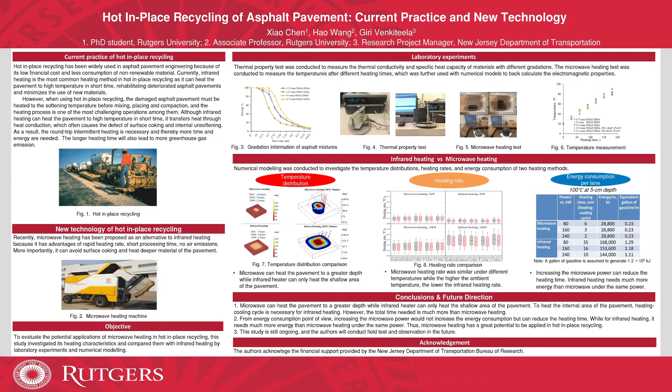Our next poster is titled An Innovative Green Pervious Concrete Made with Modified Geopolymer Materials, presented by Rutgers University, Huang. Hello everyone, it's happy to be here to share my study with you. Today my presentation title is An Innovative Green Pervious Concrete Made with Modified Geopolymer Materials.

As we know, pervious concrete is a typical type of concrete with interconnected pores, usually made with cementitious materials such as cement and coarse aggregate. Owing to its unique porous structure, it is beneficial in several pavement applications, such as stormwater mitigation, urban heat island reduction, vehicle noise reduction, and pollutant water purification.

However, the relatively lower mechanical strength of pervious concrete largely limits its applications, and the use of cement is also proved to be a major source of carbon dioxide emission. Thus, it is desired to fabricate pervious concrete for superior performance while reducing the carbon footprint.

Recently, alkali-activated geopolymer has been developed due to its better durability and environmental benefits. It does not release carbon dioxide during production, and many waste materials or byproducts can be used as raw materials. It is desired to apply the geopolymer in pervious concrete without interfering with its original porous structure and to enhance its mechanical performance. The geopolymer-based pervious concrete has high potential to be applied as a green pavement material.

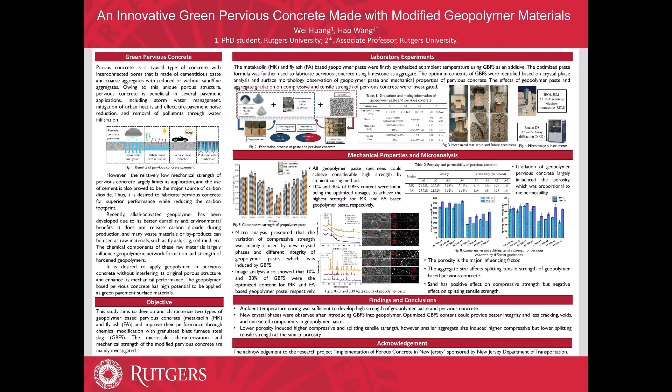In general, we found ambient temperature curing was sufficient to develop high strengths of geopolymer paste and pervious concrete. We also found new crystal phases were observed in the XRD results after introducing GBFS into the geopolymer. The optimized GBFS content could provide better integrity and less cracking, voids, and unreacted particles in the paste materials, as seen from the SEM results. We also found lower porosity induced higher compressive and splitting tensile strengths. However, smaller aggregate size induced higher compressive but lower splitting tensile strengths at the same porosity. That's all, thanks for listening.

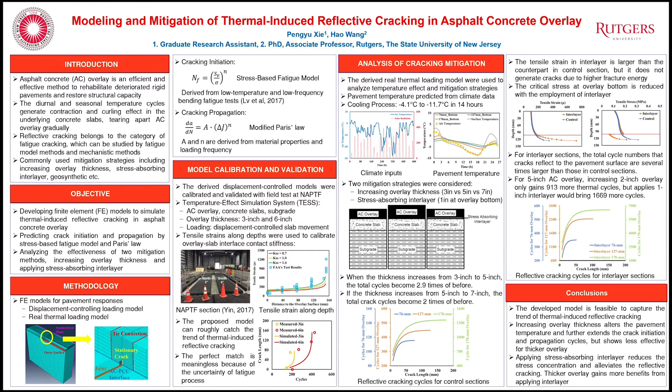Traffic emissions continue to be a prevalent source of air pollution across the globe. Those living in high-traffic urban areas are at higher risk for developing or exacerbating respiratory health problems.

Stopped traffic at intersections allows for concentrated areas of emissions, and of those pollutants, polycyclic aromatic hydrocarbons, or PAHs, are particularly concerning due to their connection to a variety of health problems.

There are a number of pollutants regulated by the EPA as well as other agencies, some of which I have listed here. PM 2.5 is regulated by the EPA at 12 micrograms per meter cubed for 24-hour mean exposure.

PM 10 is regulated at 150 micrograms per meter cubed per 24-hour mean exposure for the health concern of aggravation of cardiopulmonary diseases.

Nitrogen dioxide is regulated by the EPA at 100 milligrams per meter cubed per hour of exposure, also for aggravating respiratory diseases, as well as being linked to the development of asthma.

PAHs, on the other hand, aren't regulated as a whole. There are a few regulations out there for various PAHs.

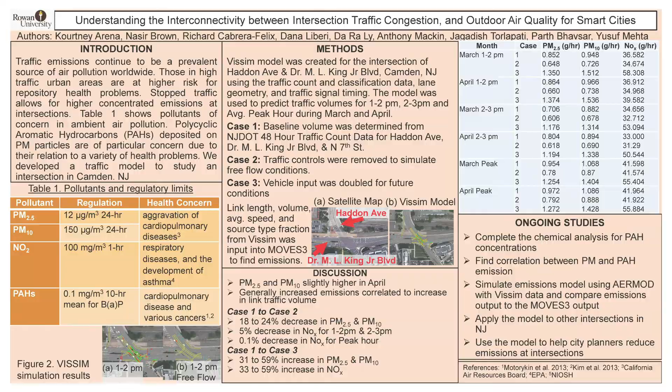Corrosion of steel reinforcing bars is the most commonly observed deterioration mechanism in concrete structures. Reinforced concrete bridge decks and pavements, particularly those in areas where de-icing chemicals are applied to roadways, are highly susceptible to deterioration from corrosion of the reinforcing steel caused by chloride ingress.

Bridge decks will freeze before surrounding roadway and thus are of particular attention for de-icing when freezing conditions are expected. In order to ensure a safe roadway for travel, de-icing is done typically with high chloride concentration brines. This is compounded by cracking of the concrete deck due to conditions such as live loading, thermal loading, and concrete shrinkage. These cracks can develop at early ages of a bridge's lifespan, even soon after initial construction.

The depth of the crack will provide an effective reduction in the cover depth above the reinforcement, and at worst may provide a direct path to the reinforcement for the chlorides.

For this project, the impact that brine concentration and the presence of a crack has on laboratory-based corrosion testing was looked at. The early results from this study were used as a companion and guidance on a larger scale model bridge deck specimen, which was subjected to freezing and thawing cycles, a moving load, and applied de-icing salts.

For laboratory testing, ASTM G109 was used to monitor the macrocell corrosion that develops between the upper and lower reinforcement. Corrosion is stated to have initiated once the specified threshold has been met. In this test method, the chloride concentration is held constant at 3% by weight, though for this testing, 5 different chloride brines from 1.5 to 9% were used.

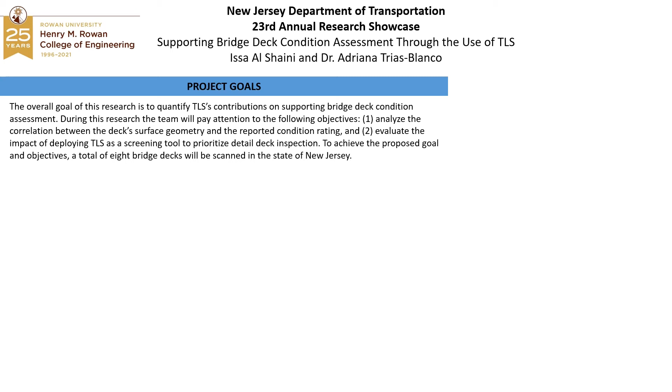In order to have a better idea on our project, we need to look at previous results obtained from the NBI, the National Bridge Inventory, through previous assessment methods used. Taking bridge structural number 0832162 for example, results for 2 different assessment methods were obtained from the NBI. A bridge deck slope analysis and an electrical resistivity data analysis were conducted on this bridge.

By having a look at the results obtained from the 2 different assessment methods, we can tell from the bridge deck slope analysis, by looking at the gradient of the color for the left side of the bridge, that it has a flatter slope than the right side of the bridge. The results showed that the left side had a 0.43% slope, while the right half of the deck presented a slope of -1.82%.

Taking a look at the electrical resistivity data analysis, it shows that the left side of the bridge presented higher levels of potential corrosion than the right side of the bridge. By combining the 2 results from the 2 different assessment methods, we can indicate that the steeper slope on the right half of the deck is allowing water to run off the deck easier, minimizing deterioration effects. On the other hand, for the left side, the flatter slope is causing water retention on the surface of the deck, causing the bridge to deteriorate and the steel to corrode.

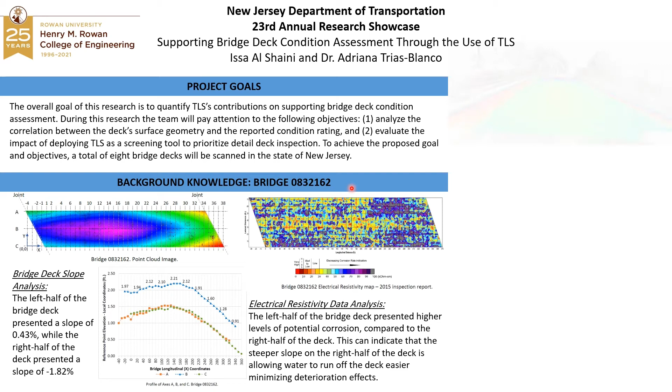By having a look on the scans obtained by our research team on the field, we can see that we were able to provide data directly about the geometry of the surface of the deck, which was not present in any of the previous assessment methods used. Looking at the scan on the top right corner, this is a registered scan through Scene software, taken by the Faro-Focus S on one of the bridges in New Jersey.

The gradient in the middle of the bridge, the green region, shows a flat slope where the gradient is not changing. In the middle, it turns into yellow and darker, which can indicate a depression on the surface of the deck, which may lead to water retention and eventually potential failure and corrosion. We were able to get this result by registering our scans and colorizing them to vary between different elevations. The right side here shows the sidewalk, and it shows that it elevates higher than the deck surface.

Finally, for our data analysis and expected results, we will compare the data obtained from the field for the 8 bridges with the data from the National Bridge Inventory, the NBI, so that hopefully terrestrial light detection and ranging scanning assessment will help in detecting vulnerable areas and predict deteriorating patterns.

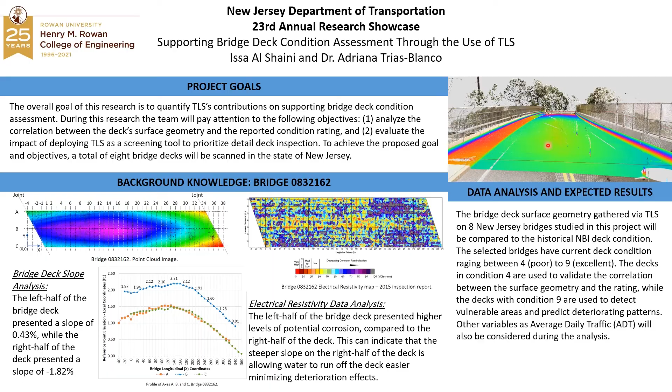Hello everyone, thank you for joining our poster session. This poster is about New Brunswick Innovation Hub Smart Mobility Testing Ground. This is part of the NJDOT research project 21-60168. The purpose is to deploy a 2.1-mile smart mobility testing ground corridor in the city of New Brunswick along Route 27 and Route 18.

The project dates back to our participation in the inaugural Innovation Challenge hosted by New Jersey Economic Development Authority. We are one of the 9 communities, together with the City of New Brunswick and DEVCO, to develop a conceptual plan of creating a data bed and testing ground for the New Brunswick Innovation Hub. Since then, the project was officially funded in 2021 for the deployment on Route 27 and Route 18, and is currently also under contract with Middlesex County to potentially expand that to a county corridor and build the state-of-the-art operation and mobility management center for the testing ground.

The key concepts of the Data City Smart Mobility Testing Ground include first creating a New Jersey mobility technology breeding ground to test out and conduct R&D of different smart mobility technologies. It includes creating the Smart Mobility Management Center that will operate the entire testing ground, all the instrumentation, together with building the Traffic Operations Center for Middlesex County.